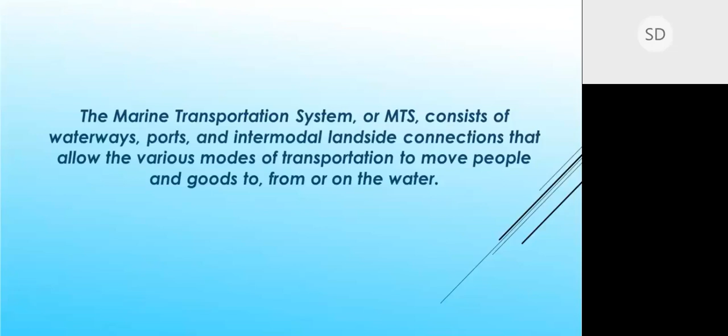The Marine Transportation System spans the globe and connects the world's major commercial hubs through the world's oceans. The Panama Canal and Suez Canal were significant early engineering improvements that ensure a seamless flow of maritime commerce around the world.

Historically, all commerce in the New World was conducted by water. As our country grew, it capitalized on extensive natural water courses and access to both the Atlantic and the Pacific Oceans to solidify its status as a global economic force.

Today, the MTS in the U.S. contains over 25,000 miles of engineered waterways, connecting 300 seaports and over 3,700 marine terminals to the global marketplace. More than 13 million people today owe their jobs to the MTS, and it contributes about $750 billion annually to our GDP. It is not a trivial mode.

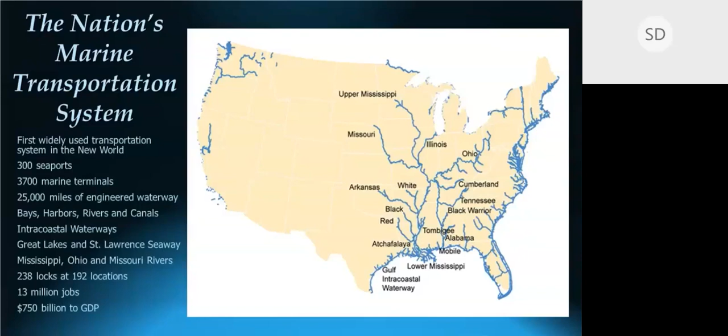New Jersey itself is truly a maritime state. We have over 650 nautical miles of engineered waterways servicing 2 international ports, a world-class fishery, and a multi-billion-dollar recreational shoreline that contributes over $50 billion annually to the New Jersey economy.

The U.S. Army Corps of Engineers and the Port Authority of New York and New Jersey manage the deep draft navigation in and out of New York Harbor and the Delaware River, as well as the 100-mile New Jersey Intracoastal Waterway that connects our back bays to the Atlantic Ocean.

The NJDOT is responsible for the operation and maintenance of approximately 200 nautical miles of state waterways, providing the critical link between those federal channels and the numerous municipal and local channels and private berths.

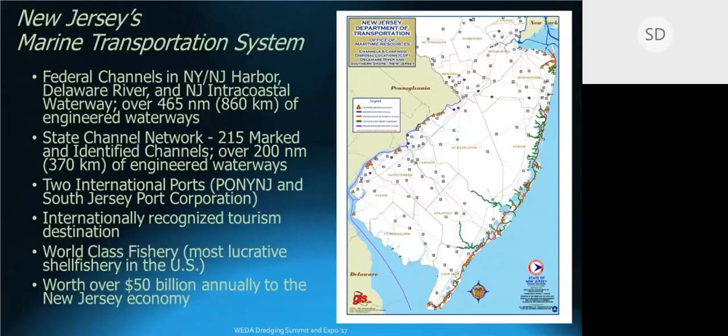So just what does this NJMTS look like? Well, it varies considerably across the state, from facilities as simple as this South Jersey boat ramp to state-of-the-art, fully automated container terminals like this one in Jersey City.

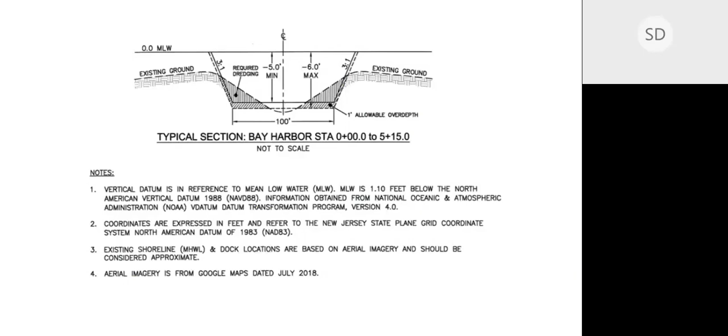Our waterways vary too, from relatively simple channels, small and shallow for recreational boating, to complex arrays of access channels into and out of the New York, New Jersey harbor that provide safe navigation for container ships as long as 3 football fields.

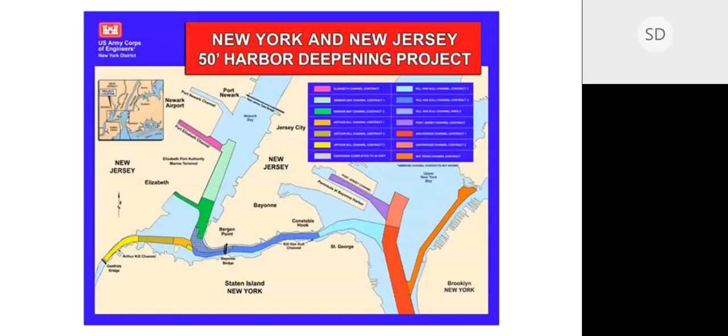These particular channels took decades to construct and cost billions of dollars. Engineering channels like these can even require our ship pilots to use simulators, much like airline pilots.

Oops, wait a minute, this one has animation that's not working. Okay, well, there's a picture of a simulator.

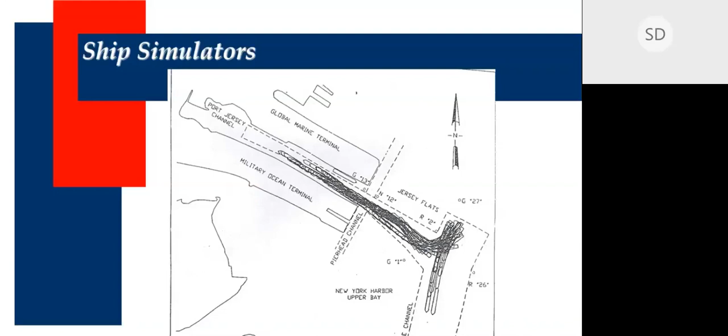But basically a simulator, much like an airline pilot would learn how to use a new aircraft or new procedure in an aircraft by using a simulator, our marine pilots actually use simulators to evaluate engineering, design, and navigability of channels.

And while the engineering of navigation channels is a fascinating area in itself, it's a topic for another day. For the rest of the hour, I want to focus on their construction and maintenance, which is what I've spent most of my career doing.

A navigation channel is an engineered waterway that has been constructed to provide a road to safe navigation from one location to another. The width and depth of the channel is dependent on the location, the type and number of vessels that will use it, and the wave and wind conditions typically encountered.

In most cases, the channel will require the removal of some amount of native material from the bottom, in other words, dredging. The amount and type of material can vary from loose mud to hard rock, and over time, Mother Nature will try to fill the channel back in, so periodic maintenance is required to keep the channel safe for vessels to traverse at all stages of the tide.

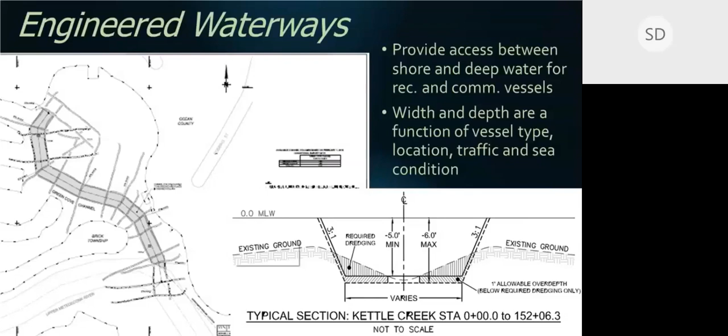Just like our highways, there are different types of channels and different agencies charged for their construction and maintenance. The main access channels from the ocean to our harbors are federal, analogous to our interstate highway system. The U.S. Army Corps of Engineers is responsible for those.

The state is responsible for providing access from local facilities to the federal system, much like our state highways. In the ports, that responsibility falls to the Port Authority, but in the rest of the state, it falls to the NJDOT. But wait, there's more.

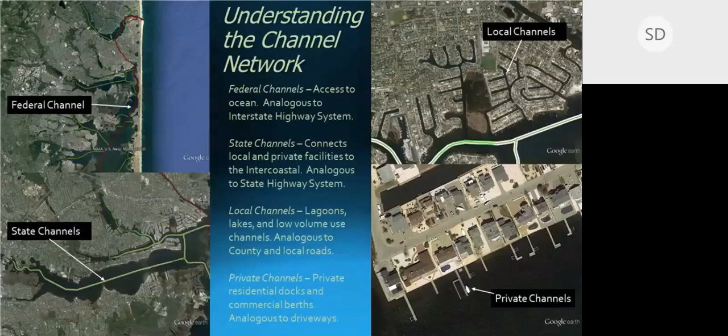Local municipalities and homeowners are responsible for providing access to the state channel network from low volume, low use, and residential lagoon communities, much like our local and county roads do. And then there are berths and terminals, which are much like driveways. Responsibility for dredging these falls to the landowner.

Channel work of any kind starts with a condition survey. Unlike roadways, a visual inspection is not possible. We use specialized sonar equipment to survey the bottom in the vicinity of the channel, and the data collected are modeled to illustrate the location, extent, and volume of shoaling.

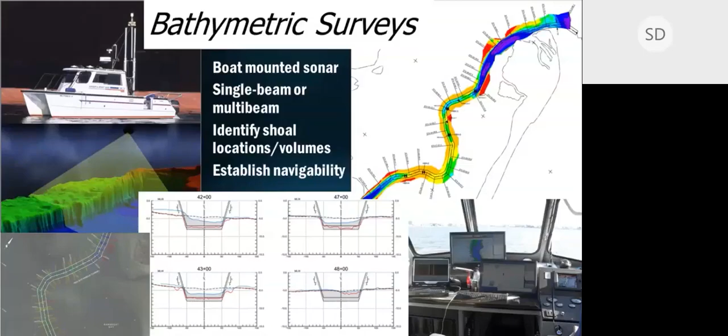Once it has been determined that the shoaling is a threat to safe navigation, it is necessary to carefully evaluate the nature of the sediment that needs to be dredged. In New Jersey, this means that the NJDEP, the New Jersey Department of Environmental Protection, will approve a plan to sample and test the material. Using the bathymetric survey, a number of samples will be designated and taken to provide a good representation of the material to be dredged, usually one sample for every few thousand cubic yards.

This sediment is then subjected to a variety of tests. Exactly what test depends on two things: the location and what we intend to do with the material once it's dredged. If the project is located in an area known to be contaminated, like Newark Bay, for example, then the chemical testing required is extensive. If the material is likely to be clean sand, then less testing is required. If the material is destined to be placed in the open water, then complex biological testing may be required. If the material is destined to be placed in a confined upland site, perhaps less rigorous evaluations are required.

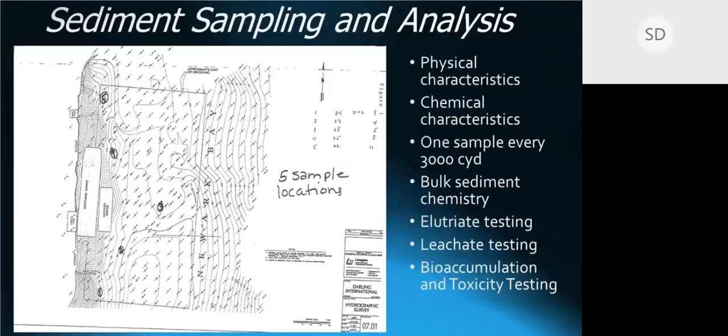The samples are typically taken using a vibracoring device, and the cores are examined by a geologist. This information is used by the New Jersey DEP and the U.S. Army Corps of Engineers during the permit process. The contractors also need this information to provide qualified bids for the dredging work. The sediment is sent to laboratories experienced with the specialized chemical and biological testing required.

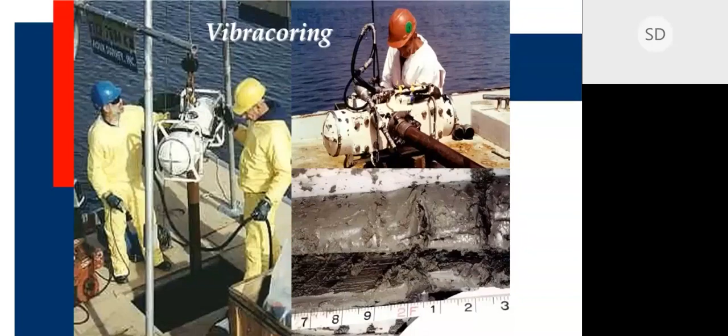The material can vary widely depending on the location and whether or not the channel is new or being deepened, or it's simply a removal of shoaled material. New construction and deepening usually involve the removal of consolidated clay and rock, while maintenance is usually limited to unconsolidated sand, silts, and clays.

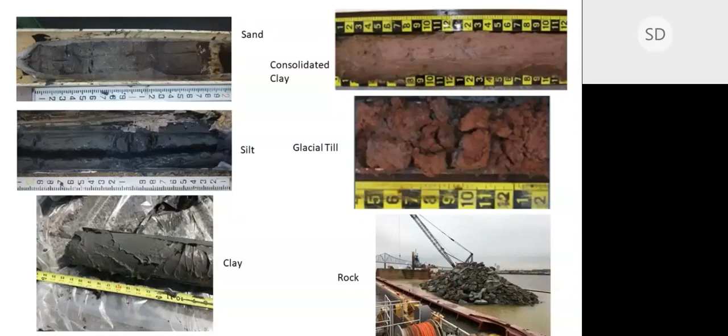Once a permit is obtained to do the work, you need to have a good dredge. Dredging equipment will vary with the job. Deep draft navigation uses very large marine equipment to efficiently remove millions of cubic yards. Dredges can be hydraulic or mechanical. Hydraulic dredges dislodge and vacuum pump sediment in a 10% slurry. The slurry is either placed into an onboard hopper or transported to the disposal site via pipeline.

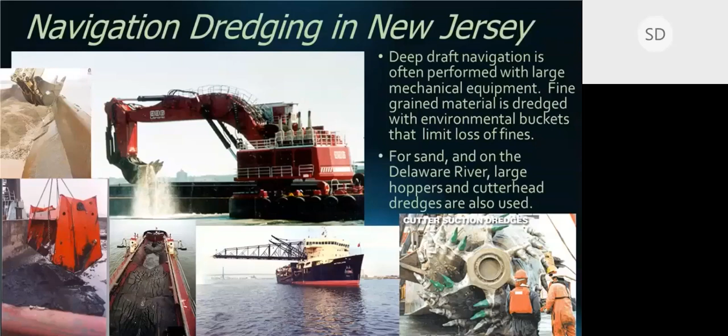Mechanical dredges, on the other hand, are either crane-mounted buckets or excavators used in conjunction with scows. In contaminated areas, specialized bucket dredges are used that minimize resuspension of fine-grained material, which can spread pollution. Shallow draft navigation dredging requires smaller equipment. In New Jersey, cutterhead pipeline dredges have been the equipment of choice for many years. However, dredging operations near shore or in very tight, shallow areas often are performed with mechanical equipment.

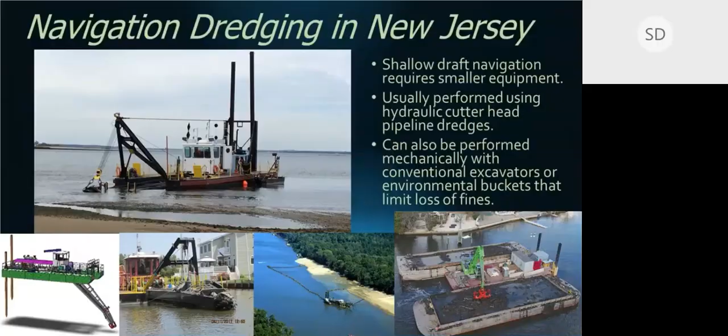I like to think of dredging in New Jersey as having three distinct flavors, and we can divide these into regions: the New York, New Jersey Harbor region, the Delaware River region, and the Atlantic Shore region. In the New York, New Jersey Harbor, we mechanically dredge 1 to 2 million cubic yards every year of moderately to highly contaminated fine-grained material, and about the same amount of clean sand, gravel, and clay. The projects are large, and so are the price tags, but this is pretty much accepted as part of doing business in the third largest port in the country.

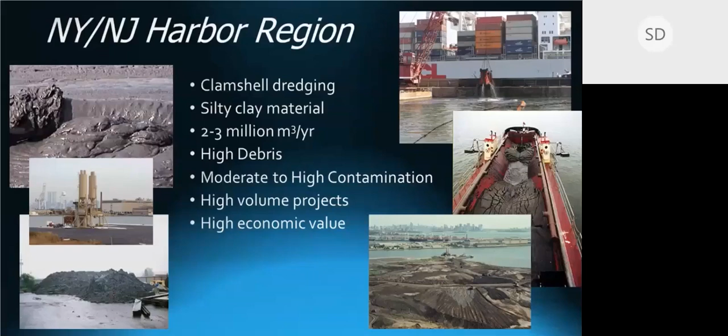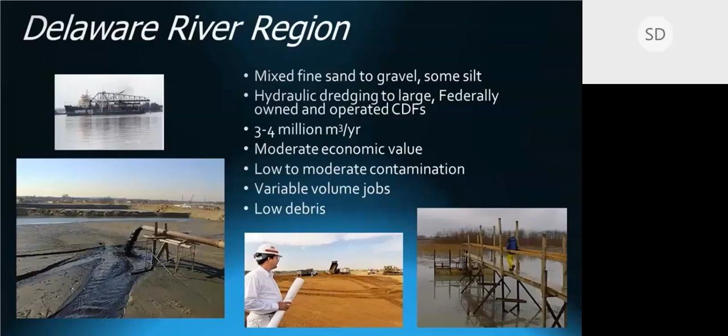On the Delaware River, even more material is dredged every year, but here the dredging is primarily hydraulic and into very large federally owned confined disposal facilities. I'll explain what those are in a bit. Costs and volumes of jobs are moderate for New Jersey, even considered routine. However, recent experiences with the Delaware Deepening Project spawned disagreements over the equipment and dredge material management techniques used, and what has worked so well for many years may not be acceptable tomorrow. Fortunately, agencies and stakeholders have been talking extensively about ways to ensure that the needed improvements in maintenance will continue to be performed.

The third region, and the one that NJDOT has the largest role in, is the Atlantic Shore region. Of the over 300 miles of engineered waterways in this region, about a third is the federal Intracoastal Waterway. The rest is either state or municipal responsibility. Projects are typically small, less than 50,000 cubic yards. The material is clean, and it has been historically dredged with hydraulic cutterhead dredges and piped upland to confined disposal facilities, or CDFs. And yes, we will explain what those are.

The economic value of these shallow draft channels, typically only 5 to 7 feet deep, as opposed to 50 feet deep in the harbor, is not nearly as high as the deep draft channels where international cargo is moved. But these smaller businesses that access these shallow draft channels often have more influence on their local communities and consequently local economies.

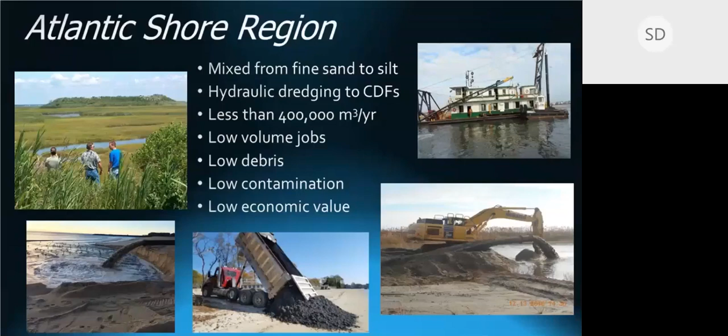So that's the system and how we maintain it. Simple, right? Except that once we have the material off the bottom, we need to have a place to put it. And that's the hard part. Unlike when I started in this business 25 years ago, when dredged material was still called spoils and was considered a waste, today there are a lot of options. Many of those options were tested and proven right here in New Jersey.

The first thing to understand about managing dredged material comes from soil chemistry. Sediment is soil that has been lifted up by rainwater and carried into a waterway where it settles out. If the material is fine-grained, and it settles through polluted water, it will tend to accumulate and hold those pollutants. If the material is coarse and it settles through clean water, it will probably remain clean. The cleaner the material, the more options for use. The second thing to understand is that sediment is a natural part of the aquatic ecosystem. It is necessary to support aquatic life, and removing it from the system is often detrimental to the long-term health of the ecosystem. Sediment is a resource.

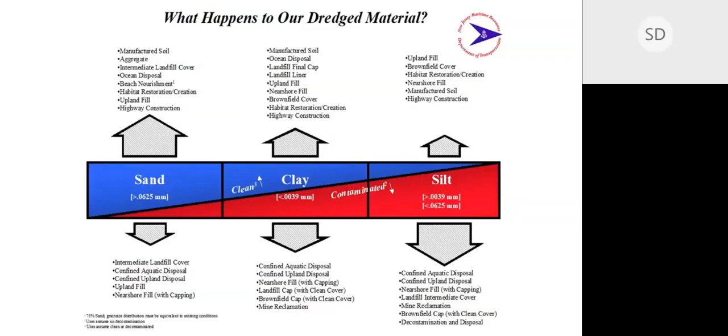Here we are. Historically, we just wanted to get rid of it. One of the main options was to place material in a confined disposal facility, or CDF. A CDF is a retention basin designed to hold the dredged slurry taken from a cutterhead pipeline dredge and hold it for at least 24 hours to allow the sediment to settle out. The water level in the CDF, and consequently the retention time, is controlled by a simple weir structure and outfall pipe that discharges the water back to the waterway from which the sediment was dredged. Hundreds of these have been built in New Jersey over the years, but over time, the sites have either been built upon or turned into habitat for wildlife. There are only about 30 of them left in the state that can be used for our program.

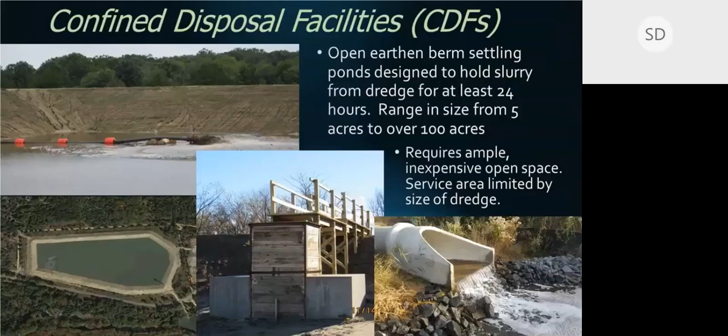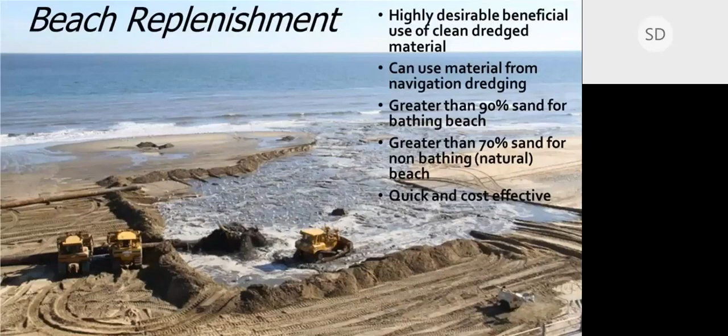If the material is coarse enough, it can be suitable for use on a beach. If the material is greater than 90% sand, we can use it on a bathing beach. If it is greater than 70% sand, but often less than 90% sand, we use it on non-bathing or natural beaches. This option is quick and relatively cheap, so we use it everywhere we can.

But in places like New York, New Jersey Harbor, millions of cubic yards of sediment requiring dredging is fine-grained and cannot be placed in a CDF because we don't have any place to build CDFs in the metropolitan area. Since the founding of the port, dredged material from the harbor was taken to a location away from the center of commerce and dumped unceremoniously on the bottom. As the port expanded, the location for dumping moved further and further out to sea. In the early 1990s, environmental groups sued the federal government over this practice, and ocean disposal is now only used here as a method for capping the historic deposits placed out there at a site off Sandy Hook called the Historic Area Remediation Site, or HARS.

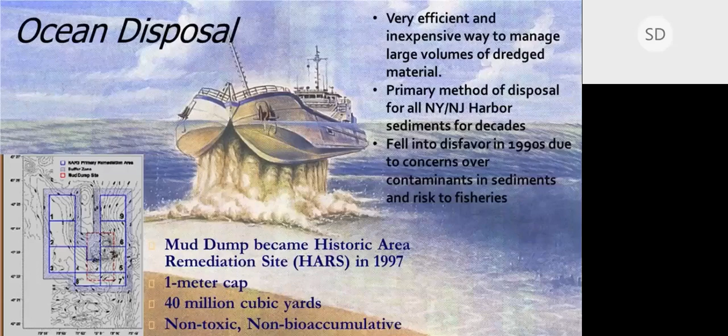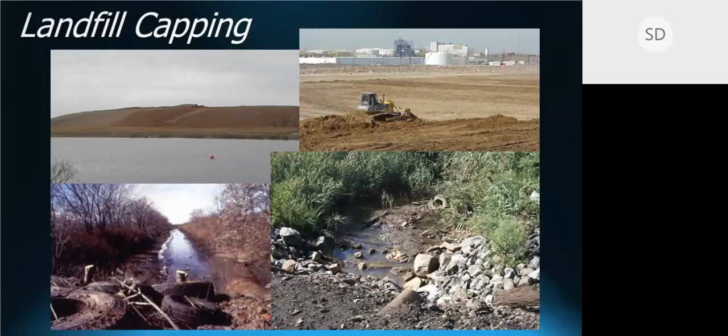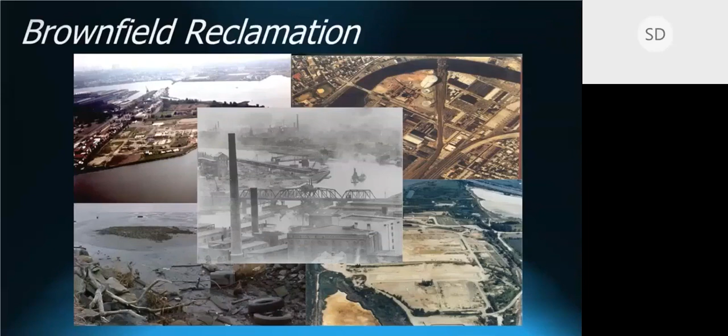So, if we can't take material to the beach or the ocean, and we have no ability to construct CDFs, what can we do with the millions of cubic yards of contaminated sediment that must be dredged every year to maintain access to our ports? One solution is to place that material upland on sites already far more contaminated than the sediment itself, like landfills. Or even better yet, old industrial sites, otherwise known as brownfields. If this material can be used to facilitate the remediation of these blighted lands, not only will we solve a thorny maintenance problem, but perhaps we can recycle the properties back into productive use.

But what if we could make it behave? Mixing it with a pozzolanic agent like Portland cement has proven an extremely valuable technique. When mixed with about 8% Portland, or the equivalent in fly ash or other materials, what is created is a material that is stackable, truckable, and when compacted becomes a monolith that will not only withstand decades, if not centuries, of exposure without breaking down or leaching the contained contaminants. In fact, it's the perfect capping material for those blighted properties I was talking about.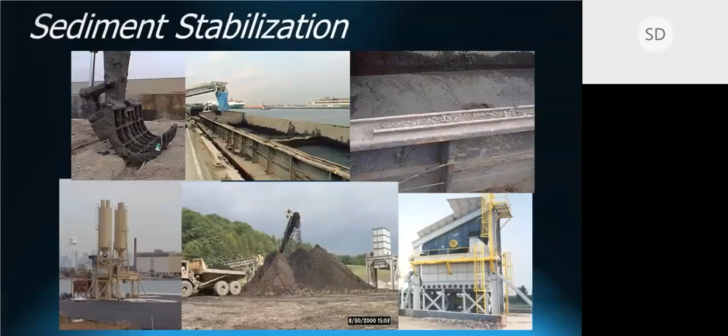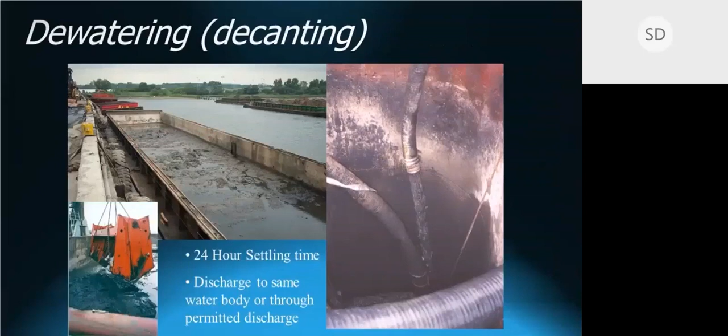And since we started doing this about 20 years ago, we've successfully dredged and placed millions of cubic yards of contaminated sediment from New York, New Jersey Harbor. How do we do it? First, we dredge it up and transport it to a wharfside facility. Then we allow the sediment to settle for about 24 hours and decant the water right back to the same water body it came from.

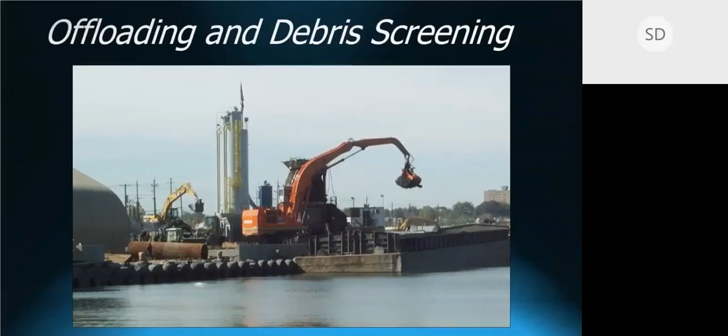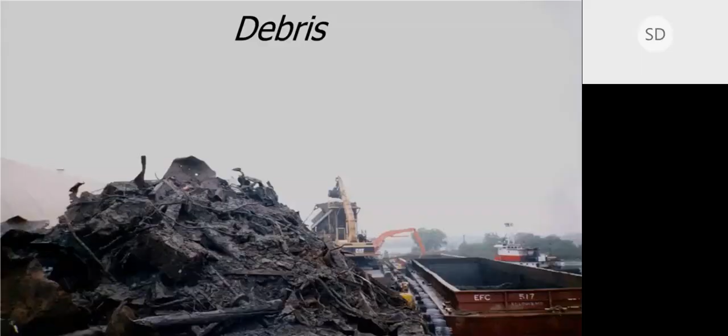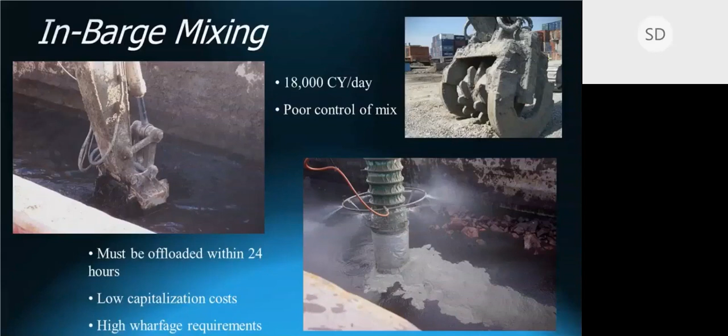Then the material is either screened for debris with a rake or put through a grizzly to remove it, depending on the mixing process used. And this isn't a trivial step because in New York, New Jersey Harbor, there can be a lot of debris. The dewatering continues by adding a pozzolan. This can be accomplished in a variety of ways. The Portland cement can be added directly to the barge, as shown here. This technique is typically used when the precision of the mixing is not that important, for things like non-structural fill for a landfill cap.

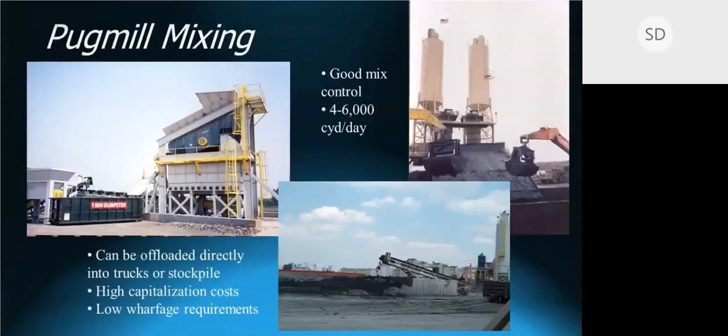For more precise engineering mixes, a pug mill can be used. And even more sophisticated techniques like pneumatic tube mixing and computer-controlled dosing can be used for highly technical applications. The techniques, however many you want to take, have their advantages and disadvantages. In-barge is quicker and cheaper, but requires more wharf space. The pug mill, however, is more precise, but it's slower and more expensive. Either way you choose, the product pretty much looks like this in the end. It's considerably different than fluid mud.

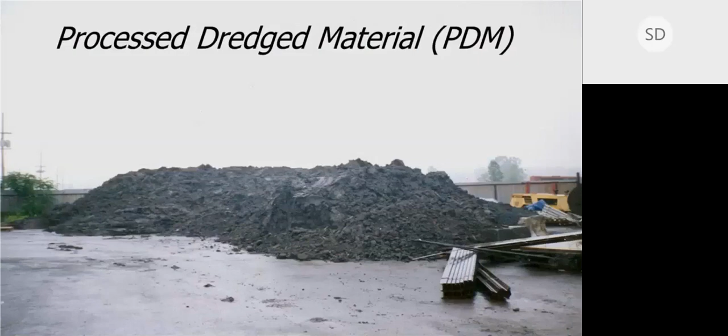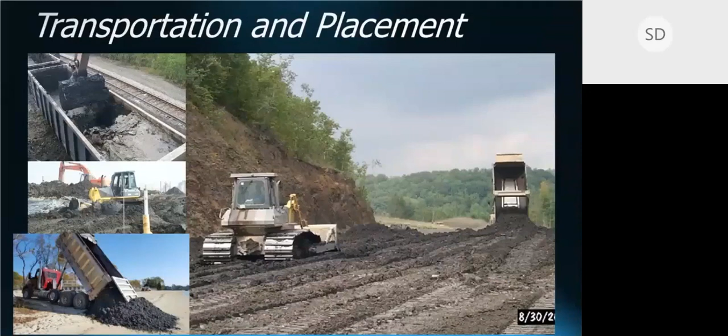In most cases, the material has to be left to cure for 24 to 48 hours, but then it can be loaded up and transported. And once it's at the site, it does require some getting used to. It's dark, often still wet, and must be placed carefully in lifts of 6 to 12 inches, but experienced operators can do it quite successfully. And it compacts and grades nicely, making for a very satisfying result. Once filled, these sites have been developed into warehouses, logistics centers, golf courses, parks, and even open space for wildlife habitat. The bottom line, it works, but it's expensive.

Prior to the closure of the mud dump, the cost of dredging was about $5 to $10 a cubic yard. Stabilization and upland placement today runs $60 to $80 a cubic yard or more. And there are only so many places where this will work. So what happens when the last contaminated site is remediated? Well, hopefully we run out of contaminated sediment before that happens. But if we don't, we have a plan.

Using contaminated sediment as a feedstock to produce value-added construction products like pozzolans or manufactured topsoil or lightweight aggregate has theoretically unlimited capacity. In partnership with the US EPA, the Office of Maritime Resources funded several pilot and demonstration projects of various technologies ranging from thermal desorption to soil washing over several years. And while many of these technologies actually do work, issues of cost, scale, and schedule could not compete with the simple stabilization techniques, and so have essentially been abandoned for now. So that's the story for high volume, deep draft, high value channels.

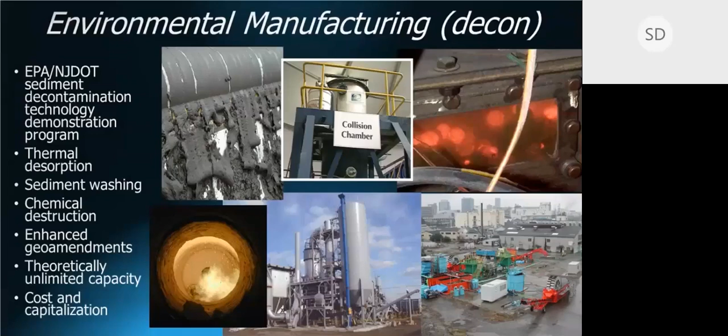What about clean, small quantity, shallow draft, lower economic value channels? The economic value of access channels to our ports may justify costly methods, but what about these recreational channels? And are those techniques even necessary if the material is clean? As I mentioned before, historically dredging was performed by hydraulic cutter head dredges, and the material was pumped onto the marshes in confined disposal facilities. But over the years, that land has either been preserved for wildlife or built upon. There is precious little left for the management of dredged material. Fully 1/3 of our system has no ready disposal option.

The Office of Maritime Resources has been searching for sustainable answers for this region for many years, without much luck. However, in 2012, a little event called Superstorm Sandy changed things. Not only was our office put in charge of maritime recovery for the Atlantic Shore region, but we also found that the people who lived there were suddenly very interested in the resiliency that can be provided by creative management of sediment, either in the marshes or on the beach.

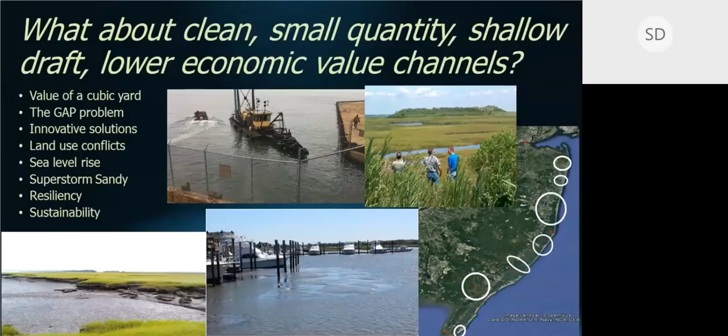The first thing we realized, even before Superstorm Sandy, was that if we couldn't build new CDFs, we were going to have to consider reusing the ones we have. That means excavating the sediment in them and finding a good use for it.

While the concept isn't difficult, most CDFs were not constructed with the idea of removal in mind. Few have access roads, and the material varies considerably in grain size, distribution, and readiness for use, depending on site drainage. However, most of the material is clean, and there's often a use for it, either as construction fill or landfill cover, or even agricultural amendment.

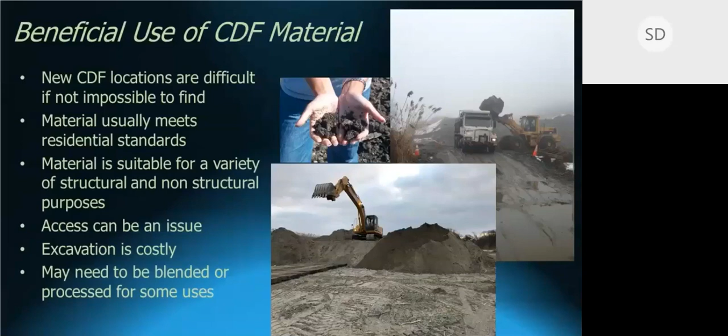The real issue is that the cost of site and material preparation, excavation, and transport can exceed that of other more conventional sources, which means we have to subsidize it.

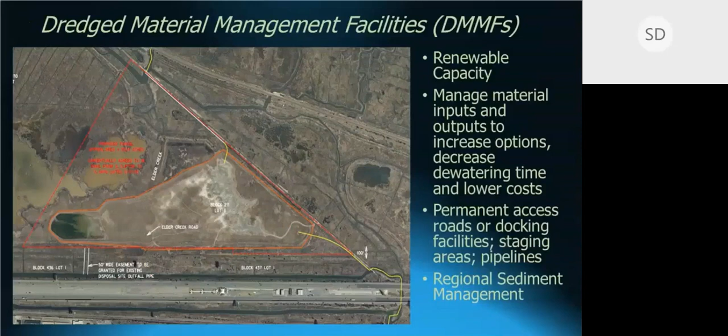So we're looking for new sites with good access for new CDFs. Rather than thinking of them as disposal sites, we are thinking of them as permanent management facilities. We are designing them with more robust berms, permanent weir and input-output structures, with equipment staging areas, and in some cases, loading and offloading docks. We're looking for larger parcels to work with, and we'll be managing them for the long haul.

But what about those areas that no longer have a CDF or have no land suitable to build one? We did think about the use of stabilization techniques. However, there are limitations to the end use of that material. And since most of our material is clean and tends to not be as silty as harbor mud, we prefer methods that are more focused on simply removing the water.

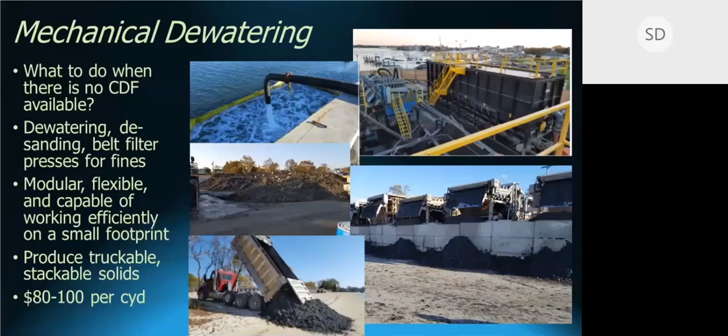Methods like mechanical dewatering, using hydrocyclones and belt filter presses, for example. While expensive, this technique can be performed on a small footprint and will keep up with our small hydraulic dredges, so it can be cost effective.

A similar technique is to use large bags made of geofabric. We usually call them geotubes, to passively dewater the sediment. The bags are filled directly with the dredged slurry and the sediment retained while the water drains into a collection point for discharge back to where it came from. Polymers are added to the mix sometimes to aid flocculation for fine-grained sediment and to accelerate the dewatering.

This technique is cheaper than mechanical methods, but requires a larger footprint, and you need several months in order for the material to get to a point that it can be trucked.

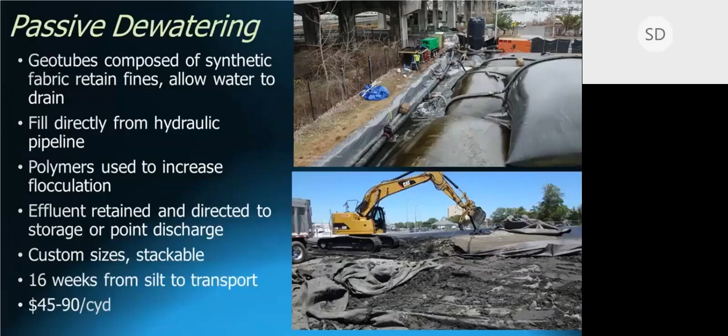Another technique that resembles something that we've done in the harbor region is to use dredged material to fill underwater pits. Again, Maritime Resources was evaluating this option even before Superstorm Sandy. In a study conducted at the Stockton Coastal Research Center, over 100 underwater depressions were evaluated for water quality and aquatic life use. Many of these depressions are actually subaqueous borrow pits, referred colloquially as dredged holes.

The excavated material was used many years ago as aggregate for beach replenishment or construction, but the pit remains. Many were determined by Stockton to be hypoxic or anoxic at least part of the year and devoid of life. Filling them in would not only restore the habitat of the bottom, but it also returns natural tidal flushing, and not the least, from my perspective, providing a home for dredge material.

Our survey indicated that there is a potential to manage millions of cubic yards of dredge material while restoring these pits, and we believe at a sustainable cost.

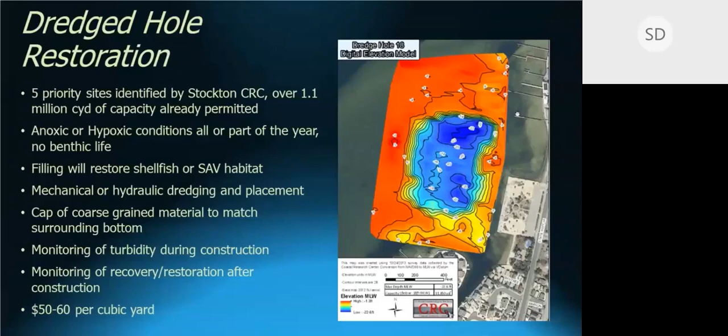One of the oldest techniques in the book is to simply remove the material out of the channel and sidecast it to another location, usually taking advantage of tide and current to dispose of the material, kind of a sweeping it under the rug technique.

This hasn't been allowed in recent years, even for the cleanest of material, due to concerns of smothering existing resources. However, in extremely high energy environments like the Hereford Inlet here, it appears that pumping material directly into the outgoing tide does not result in unacceptable impacts.

In fact, in a pilot we did in 2018, we found it hard to distinguish the dredge material from the material naturally moving in the system. This technique holds promise for those channels that suffer from rapid shoaling, ones that we would need to dredge every year to keep them open.

The U.S. Army Corps of Engineers is also evaluating this technique extensively at projects in Barnegat Inlet and at Cape May's 7 Mile Island. They refer to this technique as engineering with nature.

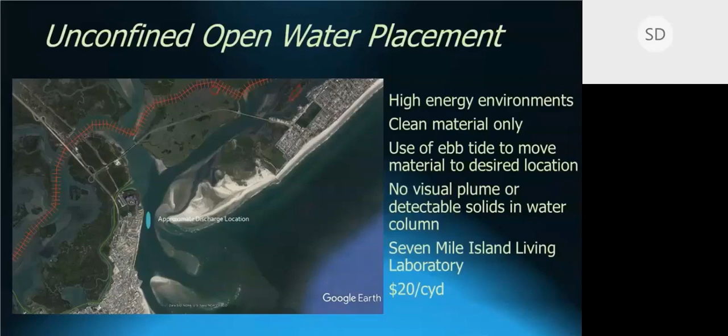Another old school technique that the Corps is experimenting with is using sand to create habitat islands. The dredged sand is simply free-pumped onto the low-lying marsh or on the edge of an eroded island to create isolated patches of habitat suitable for birds or other wildlife. Because our beachfront is so highly developed, these areas are very rapidly colonized by a variety of threatened and endangered species. I'm particularly excited about this habitat mosaic idea because it has the potential to provide me with a number of small sites where, working together with wildlife managers, I would be able to return periodically to add more material, maintaining both habitat and navigability.

We're also considering the idea of island creation. These islands would not only provide new habitat, but could also increase storm resiliency for coastal communities. You might say it's a no-brainer. However, there's always a constituency in New Jersey, and the constituency of concern here are those who prefer open water habitat or bottom sediments for shellfish.

Speaking of storm resiliency, there are thousands of acres of wetlands surrounding our coastal communities, and these marshes have been shown to be a critical aspect of coastal defense against storm damage. Recent research has shown that marshes must receive a regular replenishment of sediment in order to keep up with sea level rise. Otherwise, the marsh grass dies off, and the marsh platform itself sinks and eventually becomes open water. Traditional dredged material management techniques that remove sediment from the ecosystem actually prevent this natural accretion just when the marshes need it most.

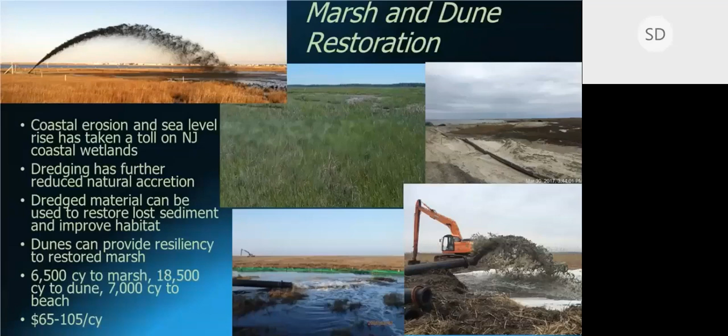This technique is not inexpensive, but it may provide us with a more dependable long-term management option simply because of the vast amount of marsh that we have. The challenge that we have is to design and deploy efficient systems to distribute the sediment slurry to the areas that need it without overfilling and without damaging the marsh in the process.

Taking this idea to the next level will be to use dredge material to restore lost marshes and stabilize the shoreline. Areas like this one in Cape May have experienced considerable damage, with many acres of marsh having been converted to open water. If left unchecked, our coastal communities will be increasingly in jeopardy from storm damage. This technique suffers not only from high cost, but typically involves some sort of hardening of the shoreline. And while hardened shorelines are a matter of course in our ports and harbors, they are not a natural or desired feature in our back bays.

The Office of Maritime Resources is currently looking at a variety of alternatives to avoid this unsightly and expensive technique. As you can see, we at DOT have been and continue to take a leadership role in developing innovative solutions for dredge material management. However, in the long run, the cost of these techniques will not be sustained on the value of the transportation infrastructure alone. We will need to find ways to take into account the total value for coastal communities in order to justify the increased costs.

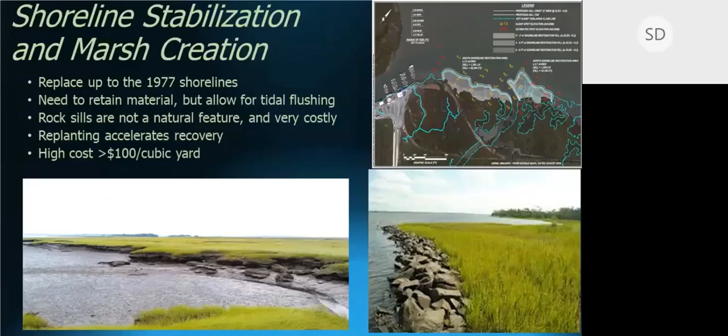Which is a good segue into our next topic, asset management. Maritime Resources has been developing asset management tools, much like a lot of the rest of you at DOT have, to better evaluate cost, condition, and to prioritize our work. One of these systems is our Waterway Linear Segmentation System, or WLS. It's analogous to the roadway straight line diagrams and is the first in the nation database of maritime assets nationwide. It includes engineering data on our channels, shoaling rates, and facilities served, current bathymetry and navigability data.

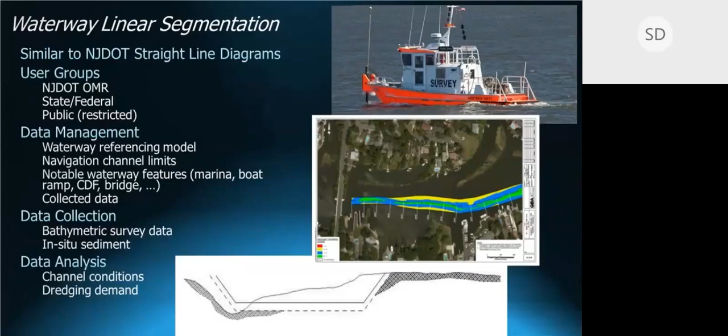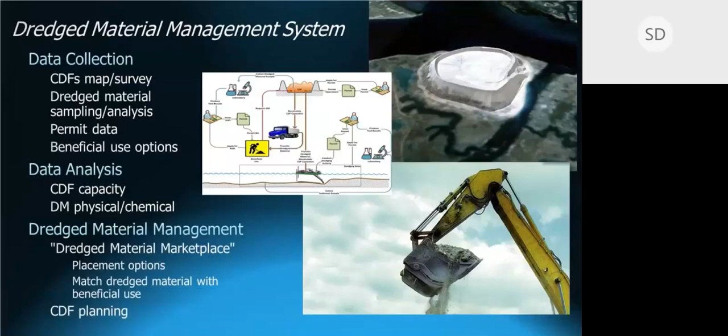As an added feature to our Waterway Linear Segmentation System, which as you now know is critical to waterway management, we've also created a dredge material database that will house all of our data regarding dredge material management facilities, sediment characterization, site capacity, draw area, materials placed or excavated, and nearby options for beneficial use. When deployed, hopefully later this year, the system will include a public-facing dredge material marketplace where available material can be explored based on needs.

Sitting on top of these two systems is a tool we call MAMS, or Maritime Asset Management System. It queries the DMMS and WLS databases and produces a plan for maintenance dredging, taking into account current and future conditions, cost, and the availability of dredge material management.

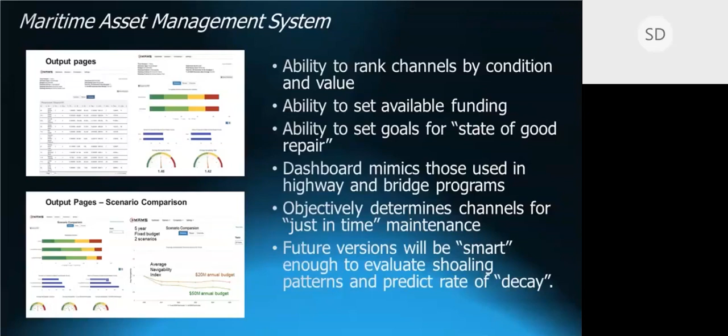Since taking over the recovery program for our state channel network in 2013, OMR has managed to dredge over 1.2 million cubic yards, clearing over 50 channels and opening up 45 miles of waterway in our Back Bay area. Some of these channels have not been dredged in decades. It cost us more than $75 million to get to this point, but we're getting some of that money back from the Federal Emergency Management Agency, or FEMA. Yes, we work with FEMA too. We're hoping that our forward-looking approach will eventually bring costs down.

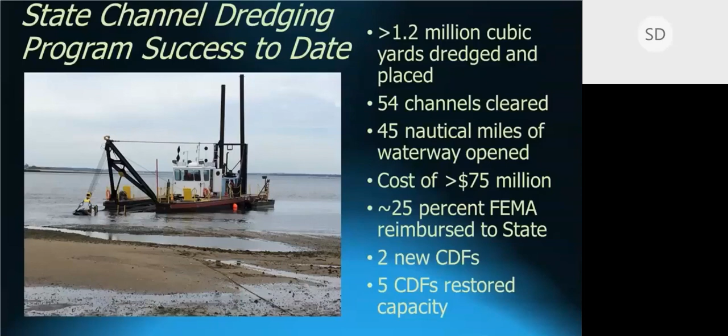And that ends my version of Dredging 101. What I'd like to do now is spend some time reviewing a few case studies.

First up is a channel in the New York, New Jersey harbor, which was one of the very first projects I worked on when I joined DOT in 1997. The Port Jersey Channel is a 1.5 mile long waterway, located between the Global Marine Terminal and the Military Ocean Terminal in Jersey City and Bayonne, just south of the Statue of Liberty.

When I joined the office, Port Jersey Channel was only 32 feet deep. Over the years, it's been deepened to 38 feet, 41 feet, and finally 50 feet. It was the largest single contract in the harbor deepening project, costing over $200 million. It provides critical expansion capacity for ever-burgeoning container traffic.

It houses the state's first fully isolated container terminal with dockside rail, an auto import facility, and a cruise ship terminal. It was a critical component of the harbor deepening project, not only because of the enormous economic benefits it provided, but also because it's the quickest and easiest path to New Jersey from the ocean for our newest megaships.

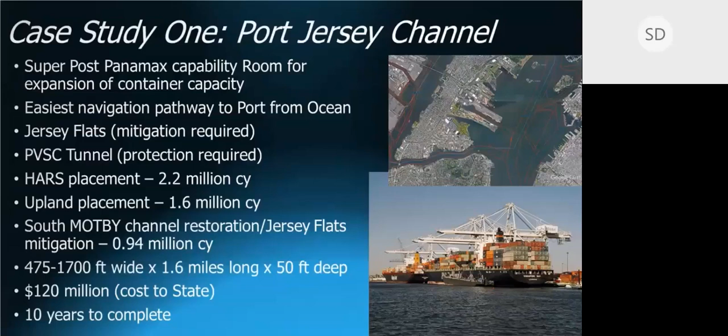Over the more than 10 years of construction, 5 million cubic yards of dredged material were removed. The material was all beneficially used, and most of the clean material was taken to the ocean, to the HARS, for capping, while contaminated material was stabilized and taken upland to various local remediation sites.

But almost 1 million cubic yards was used to restore habitat in an abandoned channel on the south side of the MOTBY Peninsula. The Habitat Enhancement Project was developed to provide mitigation for the expansion of the channel into the Jersey Flats, an important but isolated benthic habitat.

The project not only provided capacity for dredge material, but also stabilized the existing dilapidated bulkhead and restored and expanded existing habitat in the Constable Hooks Flats, benefiting game fish like winter flounder. The success of that project spawned one of the other case studies that I'm going to talk about in a little bit.

Easily the most challenging part of the Jersey project was dredging close to the century-old Passaic Valley Sewerage Commission's outfall pipe. This 12-foot diameter tunnel was hand-dug from the treatment plant in Newark, under Newark Bay and Jersey City, and out into the upper New York Bay. The tunnel carries over 300 million gallons of treated wastewater every day. The issue for us is that the pipe itself is constructed out of hand-poured, unreinforced concrete in short sections, with the top section held in place to the bottom simply by the force of the overburden material.

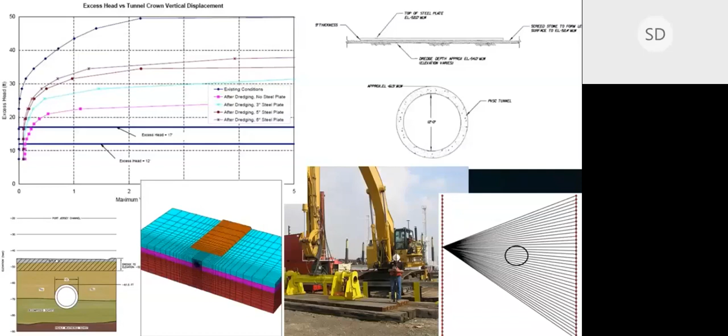The next case study I'd like to share is Shark River. This project was a significant challenge, mostly due to the lack of disposal options and significant shore development. There's barely room to move in this part of New Jersey, say nothing about managing dredge material.

The state channels had not been maintenance dredged since the 1980s. The Shark River Basin is naturally shallow, only a few feet deep at most, and while stakeholders had been arguing over potential solutions, the channels had continued to fill in. Superstorm Sandy made a bad situation worse, and the channels essentially became impassable.

Our solution was to take two very small parcels of land, one a parking lot at the Belmar Municipal Marina, and the other a public park sandwiched between a residential development and the highway, to dewater the dredge material using a combination of passive and mechanical techniques, and to haul that material away to the Monmouth County Waste Recovery Facility in Tinton Falls to be used as landfill cover.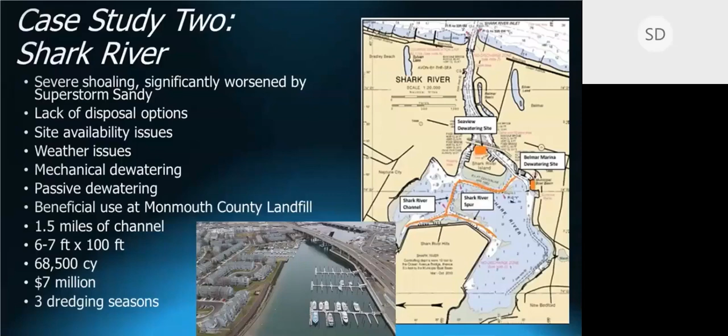The mechanical solution was used extensively in Season 2. I know it sounds like I'm getting out of order, but I'm not. It was composed of a series of hydrocyclones and belt filter presses.

The hydrocyclones removed the sand, and the belt filter presses dewatered the fines. Polymers were added to facilitate flocculation of the fines and accelerate dewatering. The water was returned to the bay and carefully monitored for contamination and suspended sediments, since Shark River Bay is under a total maximum daily load, or TMDL, for several contaminants.

Most of the material was hauled to that landfill, but a small amount of high-quality sand was used to replenish an adjacent public beach.

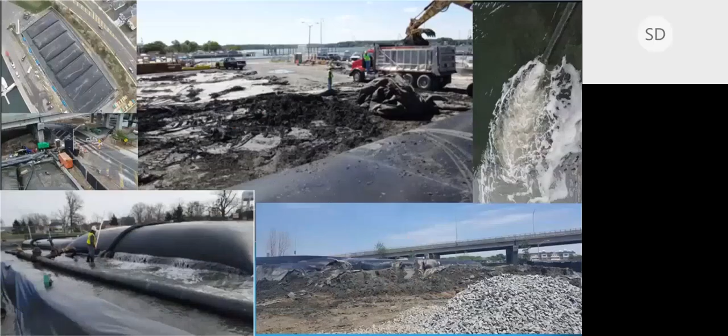In the first and third seasons, we deployed geobags to dewater the material passively. Initially, this solution was only intended to be a backup plan, but contractual delays shortened Season 1 to only a few weeks, providing insufficient time to mobilize the mechanical plant.

And since the permits prohibited us from dredging between January and June to protect winter flounder and anadromous fish, the material would have a chance to dewater before the mechanical equipment had to be set up. So we took advantage of what time we had.

As it turned out, we were unable to complete the project using the mechanical dewatering equipment in Season 2, and the parking lot was not going to be available for another season. So in order to finish the project, we mobilized geobags again, at a bigger scale, at the Seaview Island Park.

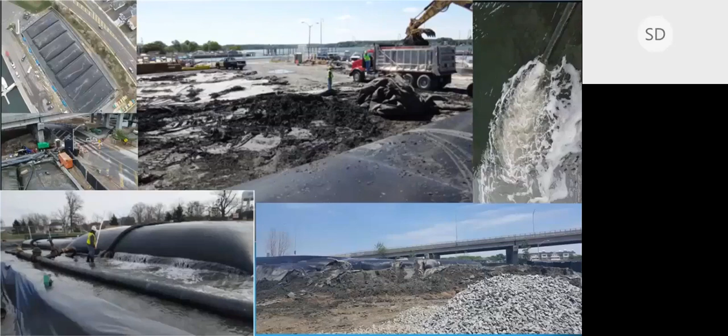Most of this material was again taken to the landfill, but some was left behind at the request of Neptune Township, and they're going to use it for a shoreline stabilization project.

The last project I'd like to share with you is the restoration of a dredged hole in Upper Barnegat Bay. Again, this area is highly developed, and there's no available options to manage the dredge material. Dredging has been deferred for decades.

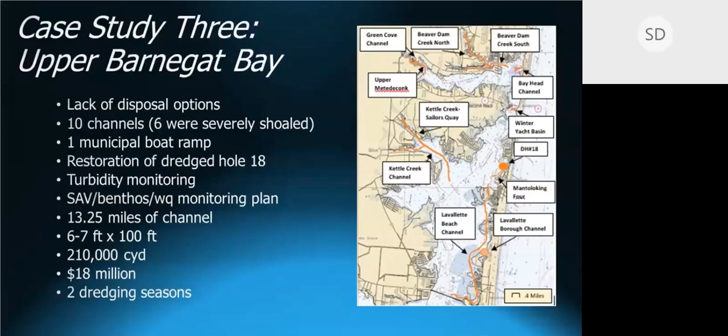But in this particular case, our evaluation of the dredged hole revealed that the circulation in it was very poor and that it was hypoxic for at least part of the year. There was very little, if any, aquatic life usage on the bottom of the hole.

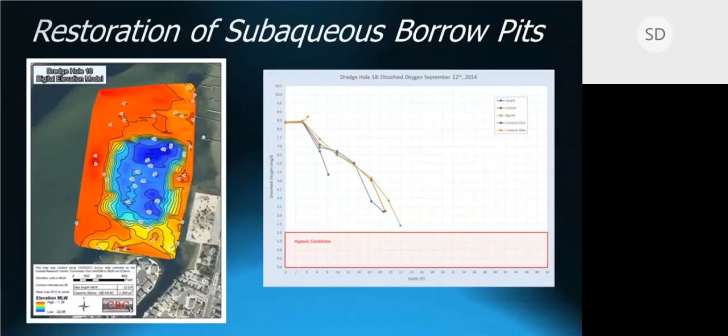By filling the hole, there was good reason to believe that the area would become similar to the surrounding bay bottom, and given the potential to increase the habitat for valuable SAV and the associated marine life that goes with it, convincing the resource agencies to let us fill it up with dredge material and restore the bottom was not hard.

We contracted with H&L Construction, and they dredged over 200,000 cubic yards of material from 10 channels to fill the hole, using mechanical dredges at both ends. Given the existing SAV bed started right outside the hole, we had to install a mile of turbidity curtain to ensure that dredge material did not smother the plants.

We monitored turbidity both inside and outside of the curtain at both ebb and flood tides daily to detect any plumes that might be generated. What we found was that wind and waves actually resuspend way more bottom sediment naturally than our dredge did. There was no evidence that dredge material was even getting down to the curtain, say nothing about into the SAV beds. So we took the curtain down in season 2 and continued to monitor the turbidity. In very few cases did the turbidity observed around the operation exceed our permit requirements, which were 1.5 times background.

We finished this project up earlier this year, and we'll be monitoring the success of the restoration over the next 3 years, looking at SAV, water quality, and benthic organisms. In the meantime, we've started work restoring another dredge hole in Lavallette, just south of this one.

Dredge hole 25, as it's known, will hold as much as 250,000 yards of material. And permits are pending on another hole in Atlantic City known as dredge hole 86, with a capacity of almost 700,000 cubic yards.

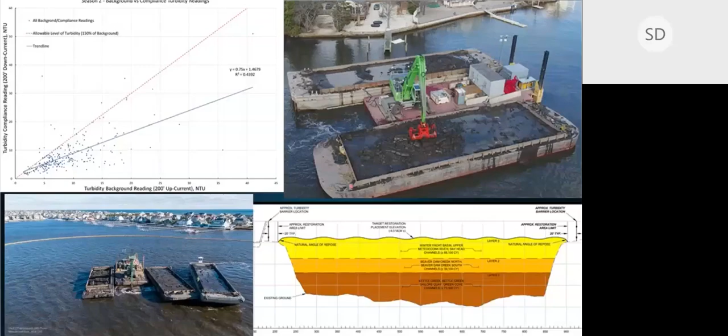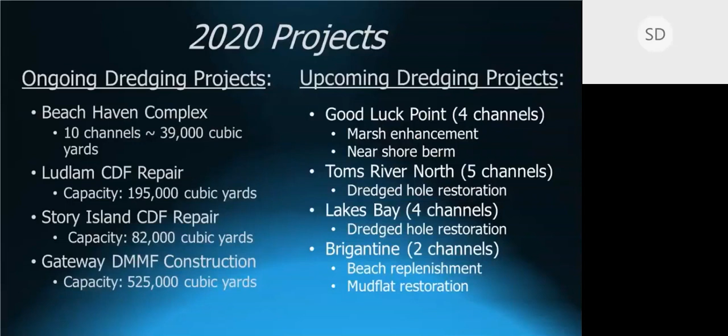At present, we have 4 projects underway: Beach Haven and 3 CDFs—Ludlam, Story, and Gateway. We have another 4 scheduled for this fall at Good Luck Point in Toms River, down in Lakes Bay in Atlantic City, and Brigantine. These will open up another 15 channels and remove another 230,000 cubic yards.

And we aren't slowing down. We have another 57 channels in the pipeline now and several new technologies to be explored. We're working extensively with stakeholders to take advantage of opportunities and to ensure that we take community preferences and priorities into account as best we can.

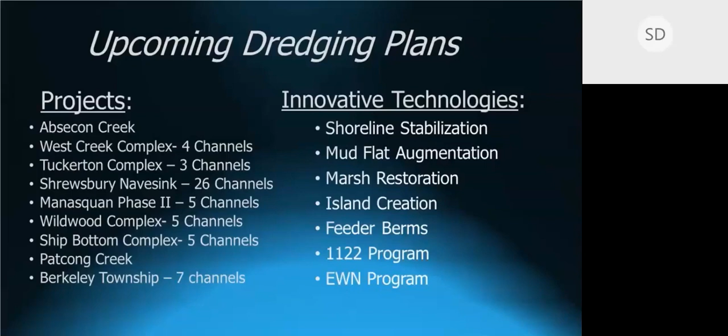There's every indication that we'll meet our goal of 2024 for completion of Superstorm Sandy recovery efforts. It's our long-term goal to have a proven and sustainable program that will keep New Jersey's marine transportation system in a state of good repair for years to come.

And that's quite enough for me. Thank you for your attention. I hope that this whirlwind tour was helpful. I'll now answer any questions that you have as best I can.